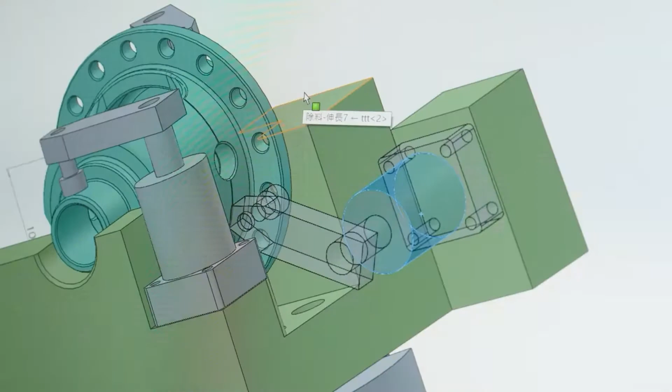Facing the fast-changing era, by refining its strengths in the industry, HOTA is always creating brand new values between tradition and innovation. With great visions and company strategies, HOTA has transformed from traditional manual manufacturing to one of the promoters in the field of intelligent technology in the era of artificial intelligence.

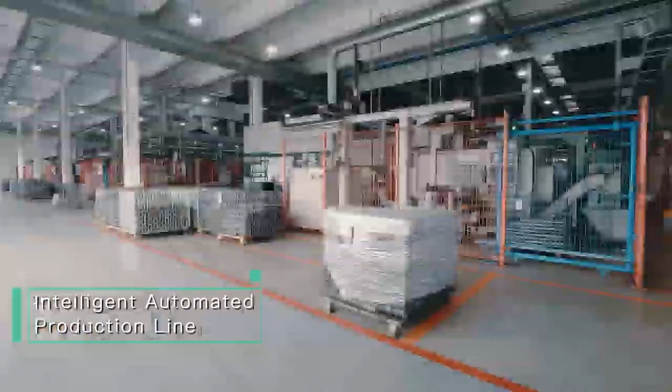HOTA has the finest R&D team. Our customers from all over the globe rely on our engineering capability and co-develop products with HOTA as their trusted partner. From monthly-based to minutes-and-seconds-based production processes, the key element of what we call the magic process is the introduction of one-piece flow automation.

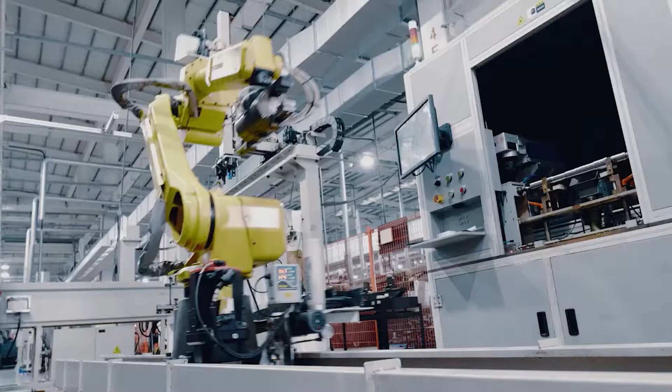At the beginning of the manufacturing process, HOTA introduces the technology of virtual ID and QR codes to establish product traceability and strictly review each process.

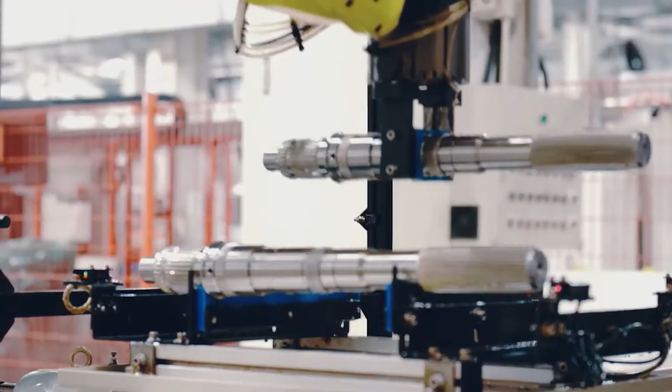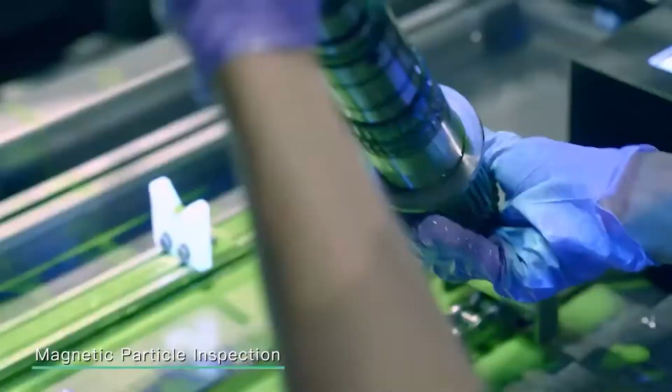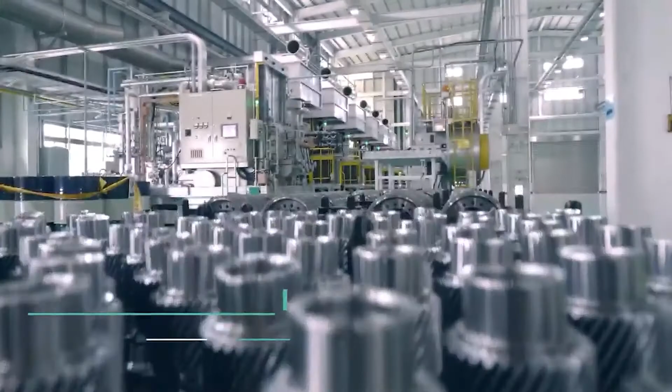We believe that the combination of manpower and machine plays an important part in our quality control. The simultaneous utilization of top-grade equipment increases the strength and wear resistance of our components.

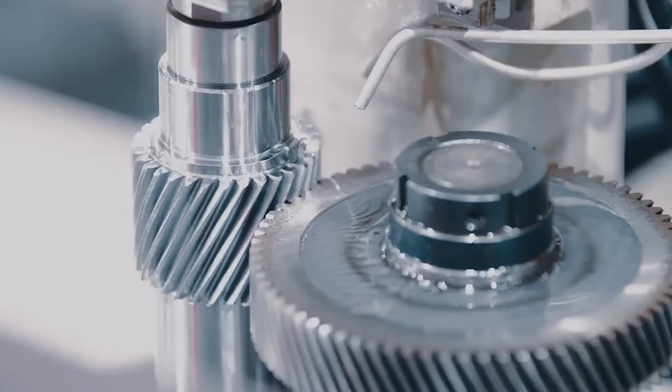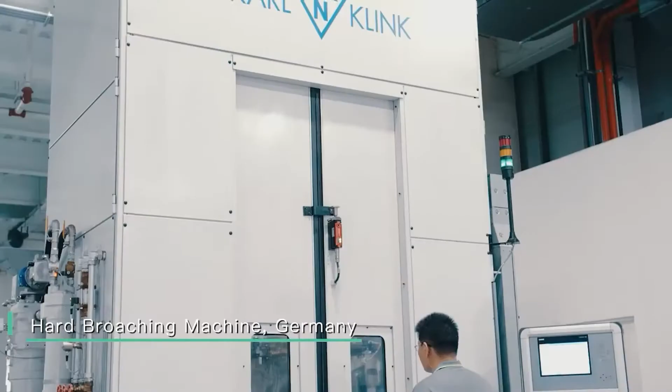HOTA is committed to developing its own gear machines and also investing in world-class advanced gear grinding machines as the highest precision finishing process. HOTA is the first company in Taiwan introducing German hard broaching machines in order to enhance the company's key technology and strengthen core competencies.

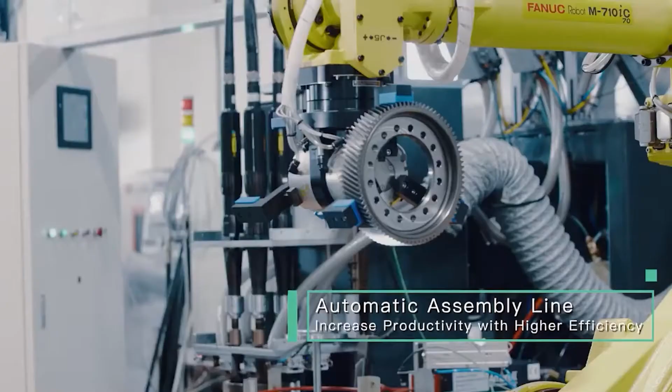Compared to traditional production lines, utilizing automation and intelligent management can save up to 70% of the manpower. Moreover, through AI integration, it helps us analyze and improve production lines more effectively.

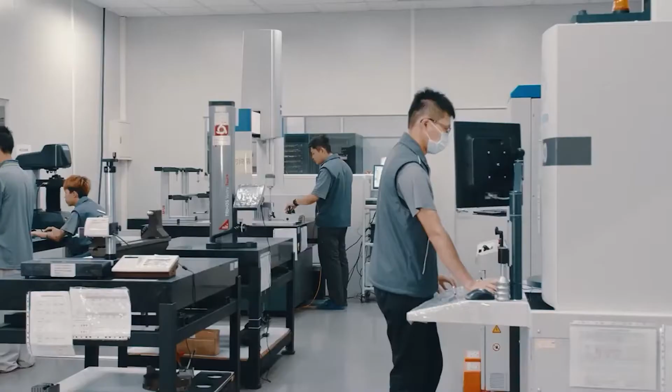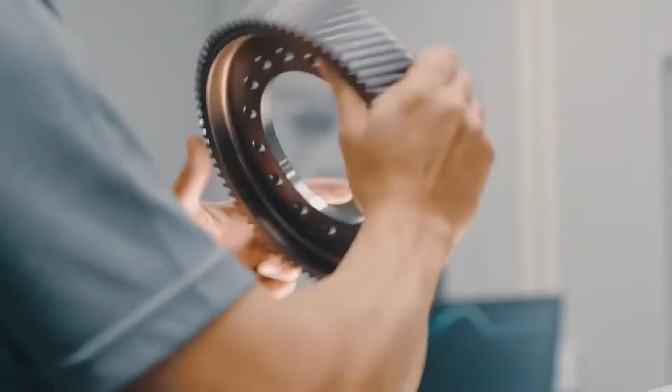In the high-speed production flow, our products pass repeatedly high standard tests and strict in-process inspections. The yield rate reaches as high as 100% for finished products. This result motivates us to engage even more actively in developing and expanding the scale of our automatic production lines.

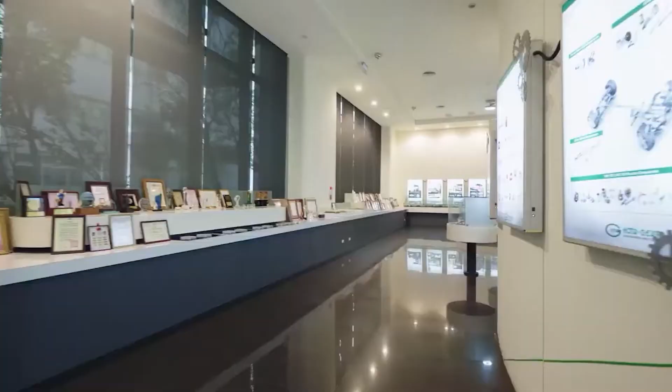Innovation, quality, and efficiency have always been HOTA's core principles. We are proud of awards and certifications from domestic and global customers and professional institutions.

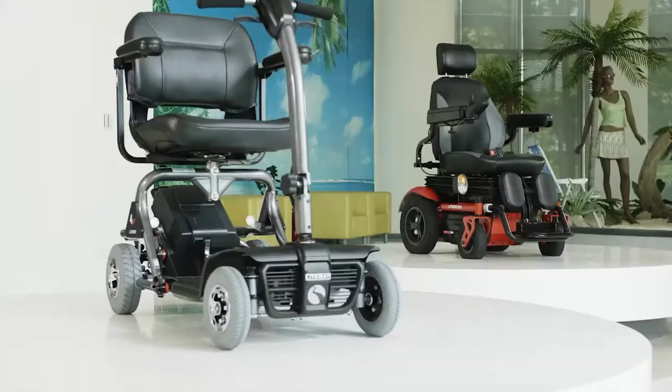Reaching out to our global partners and customers from Taiwan, we are committed to providing our services with no geographical boundaries and time differences. HOTA designs and develops user-friendly products with our own technologies, including gear machines, electric wheelchairs, electric scooters, electric ATVs, powertrain components and assemblies for EVs, ICE cars, motorcycles, trucks, agricultural equipment, and industrial machinery.

With its excellent capabilities, HOTA manages its business across multiple dimensions and industries. In the meanwhile, HOTA has also been actively participating in social welfare as part of our corporate social responsibility. HOTA is committed to promoting the use of renewable energy as a socially responsible corporation. We aim to build a green and intelligent life for a better future.

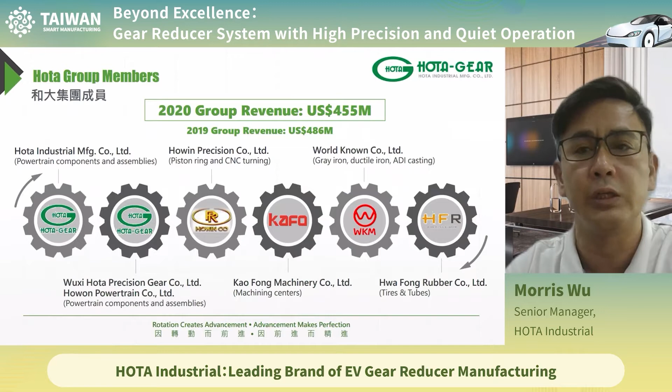As we all know, the pandemic brought economic impact globally last year. HOTA Gear consists of 3 divisions. The transmission division is the biggest scale and is the main source of revenue. The other 2 are the medical equipment division and the machinery division.

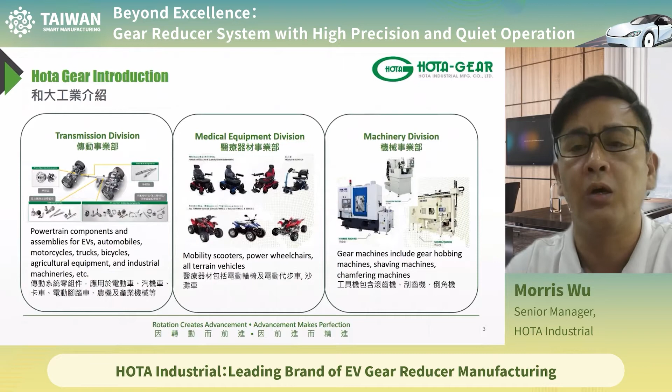Having nearly 60 years of experience in machine, we have developed our own gear machines, including gear hobbing machines, shaving machines, and chamfering machines. The company was founded in 1966 and is now in its 56th year.

We started out as a motorcycle parts manufacturer, and in 1995, we transformed into an automotive manufacturer. It was also in 1995 when we entered the US OEM market. The company went public in 2000, and in 2012 we started to exploit the electric vehicle market in the US. Our entry into the electric vehicle market was several years ahead of other domestic companies in the industry.

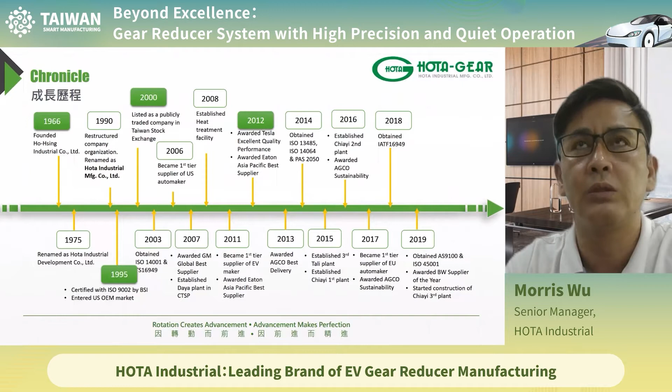HOTA has built a global network worldwide. Our headquarters is in Taiwan. We have sales and logistic offices on the East Coast and West Coast of the US. In China, we have manufacturing plants in Wuxi and Huai'an. And then in Japan, we also have a sales office in Osaka.

What you see are our production bases in Taiwan. The Daya plant on the left is where the company headquarters is located. The Tali plant on the right is where we started the company from scratch. Then we have the rather new established factory in Chiayi, plant 1 and 2. Both plants are mainly responsible for manufacturing components and parts of electric vehicles and hybrids.

Production lines here carry out one-piece flow automated manufacturing and are under intelligent management. At present, because our business in electric vehicles has been growing fast, Chiayi Plant 1 and 2 have already reached full production capacity, which gave rise to the planning of Plant 3. The hardware construction of Plant 3 was completed in May, and we are now in the process of moving in and setting up the production lines.

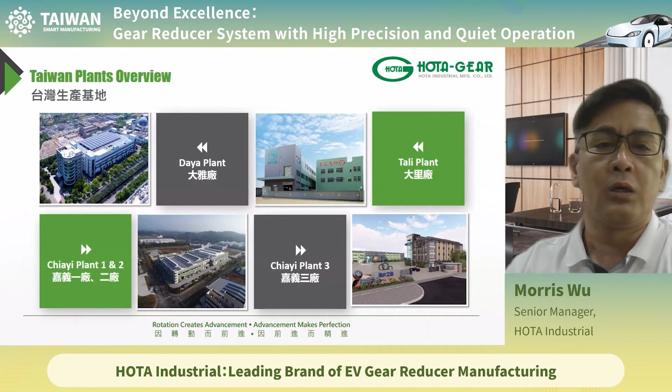Let's take a look at the machine automation in our company. On the left, you can see the automated production line. No manpower is needed from the beginning of the manufacturing process to finished products. We introduced QR code technology to enhance traceability. We can track the status of each machine at a certain minute and second to strictly review each process.

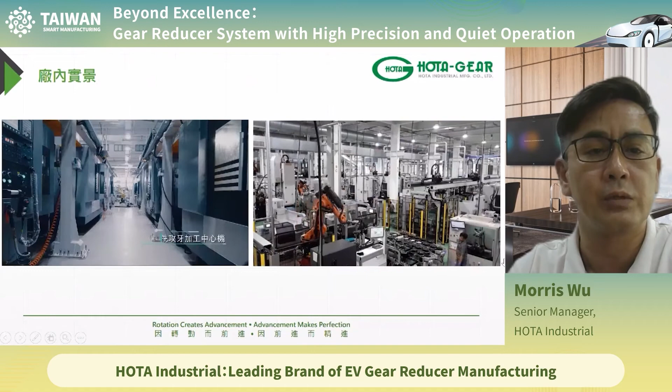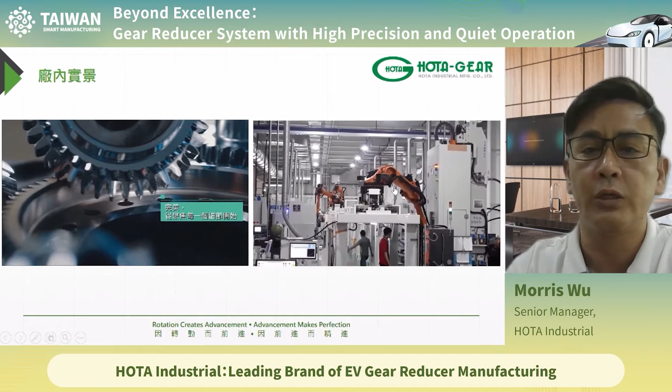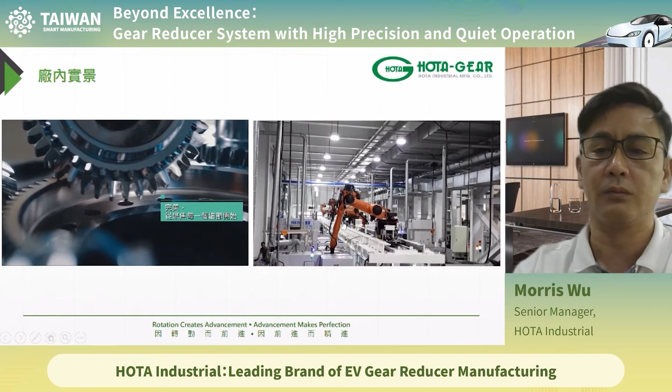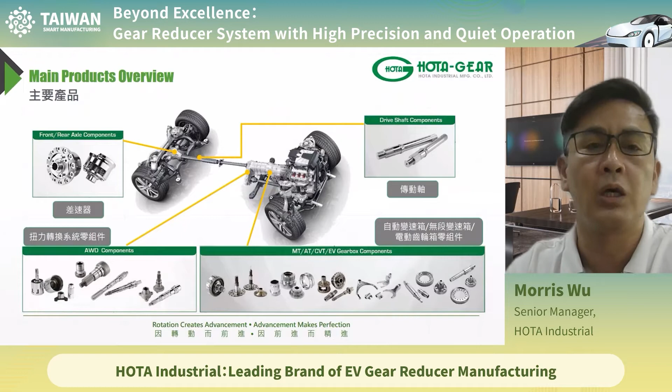Next, I would like to cover more about the transmission division. I did briefly mention our machining products of chassis parts, and now let me break down the main products into more detailed categories. Basically, HOTA manufactures transmission products from engine, transmission, transfer case, transmission shaft, front and rear axle to cantilever. HOTA owns excellent capabilities in machining, including electric vehicle transmission and motor shaft that are now on the rise.

For the time being, North America is our biggest market. Among all our products, about 85% are manufactured for automobiles and trucks. And among those 85%, 40% are for electric vehicles and hybrids.

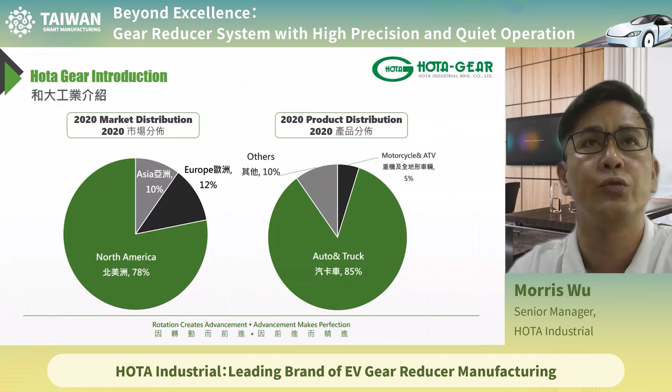Also, there are a few hydraulic and traction transmission manufacturers, but I won't go into too many details here.

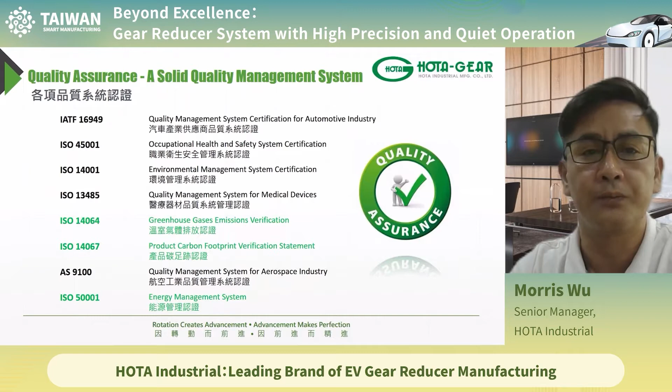HOTA owns outstanding inspection capabilities. We have testers able to carry out a wide range of inspections, including hardness, chemical materials, and microstructure. Our products are more of high precision, so the testers need to cover geometry and different dimensions and size. Besides contact inspection, we are also developing AOI, moving towards optical inspection.

Then it comes to what we do best. Since HOTA is a gear manufacturer, we have all kinds of gear measuring machines, including gear testers and mesh testers by Germany, America, and Japan.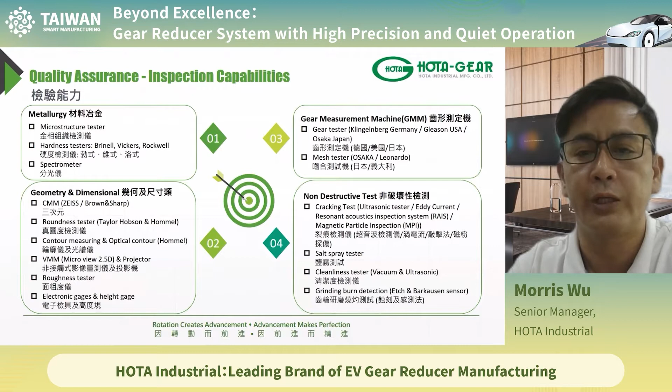We are also capable of conducting non-destructive tests. There are various kinds, all of which have to meet the strict requirements of our customers. One of them is cleanliness, which is especially and strictly required for electric vehicles. HOTA has actually started the introduction and practices of cleanliness testers since 10 years ago.

In terms of our manufacturing capabilities, HOTA can do all kinds of before and after heat treatments. We are equipped with the most comprehensive capabilities in soft machining, from gear hobbing, gear shaping, gear shaving, and broaching, to turning, milling, drilling, gun drilling, and spline rolling.

Then comes to after heat treatments, which is hard finishing and requires higher precision. We are capable of gear grinding, hard broaching, hard hobbing, gear honing, OD and ID surface grinding, and we can also conduct shot peening and straightening.

The requirements for electric vehicles are becoming more and more strict in recent years. In terms of gear grinding, our company started the research and development more than 20 years ago, and the technologies have already been very mature, which is why our global customers put their trust in us.

One of our clients is a world-leading American automaker. They came to us and we helped them achieve quality noise reduction.

We keep focusing on enhancing our capabilities, including developing vertical integrated forging plants and heat treatment plants for laser welding, electron beam welding, and so on. We continue to update and refine our manufacturing capabilities and introduce more advanced technologies so that we can maintain our competitiveness in the increasingly challenging electric vehicle market, as well as provide the best solutions to our customers.

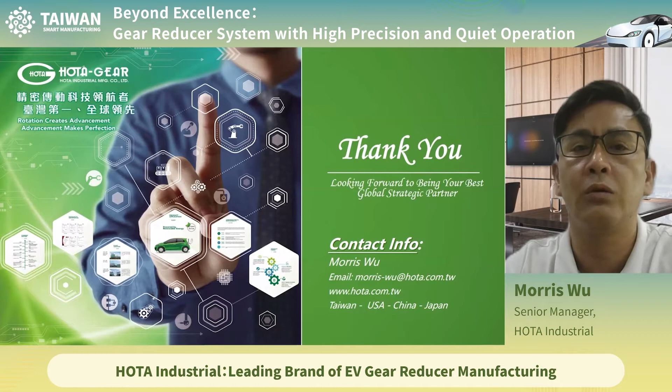Machine tools is a crucial processing equipment for automobiles and motorcycles. Today, we are pleased to have Jason Yu, the Assistant Vice President of KAFO, to share with us their high-performance machining centers that support the key components of electric vehicles. Let's welcome Jason Yu.

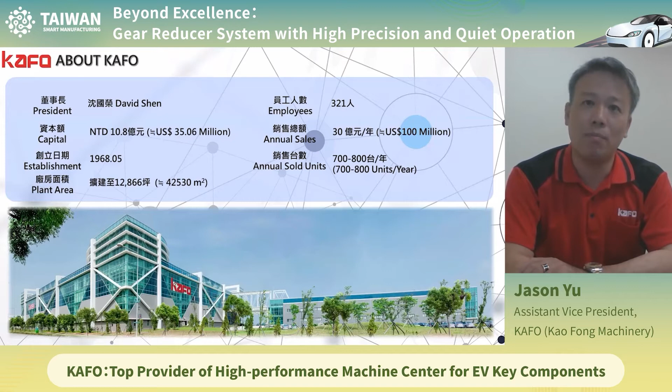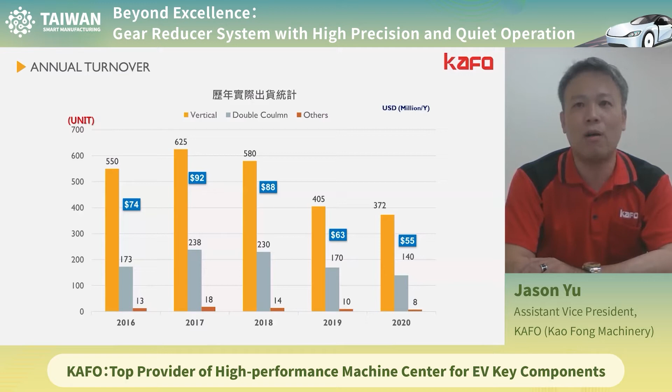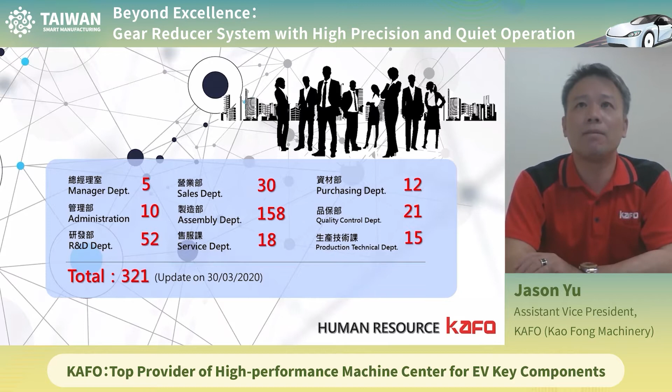But then we met Mr. Shen. He believes that machine tools are one of the most important production tools, and they are closely related to the manufacturing of his company's products. Moreover, there are a wide range of applications to the downstream sectors, such as traditional machinery, automobile, power equipment, railroads, ships, aerospace, national defense, petroleum, chemical engineering, machinery, and medical industry, all of which require machining tools to complete the manufacturing process. After Mr. Shen joined KAFO's big family, he gave the company a very clear orientation, which is quality first, service first, innovation, and R&D, so that everyone has a goal of moving forward to learn and progress. Because of this, KAFO was able to slowly turn the corner.

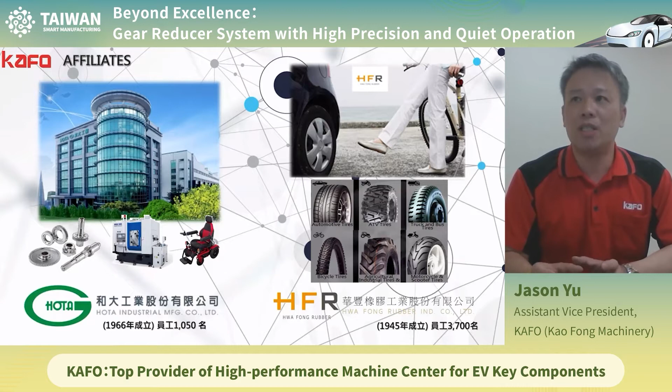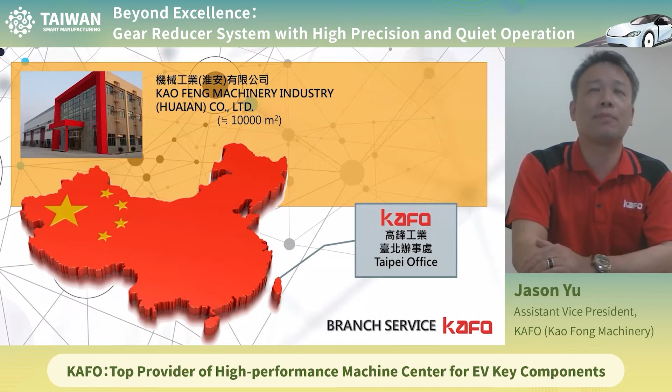As mentioned, KAFO's marketing distribution used to be limited, but after the efforts we put into our business in the past 10 years, we have made our way to the global market. Our customers are now mainly in Asia, which accounts for 60%, including Japan, Korea, China, Singapore, Malaysia, Indonesia, and India. 10% are in the Middle East, mainly in Turkey. We have clients in both Eastern and Western Europe. Almost all European countries use KAFO's equipment. Our Americas market is mainly located in the US and Canada. Only 1% is in Africa, which is the market KAFO needs to work hard to expand.

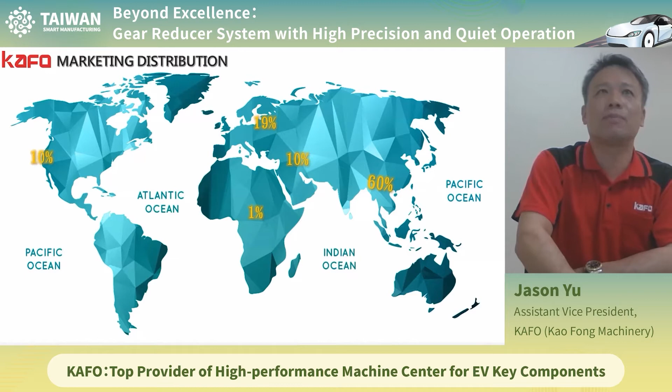In terms of certificates, we have ISO 9001 and ISO 14001. These are the certificates KAFO received from the Taiwan Excellence Award in recent years.

Our products consist of 5 categories: vertical machining centers, double column machining centers, horizontal machining centers, 5-axis machining centers, and gantry-type machining centers. For vertical machining centers, there are 3 sub-series: the 3-axis linear guideway design, the 3-axis hard rail design, and the design of XY-axis linear guideway with Z-axis hard track.

Most of our EV customers choose the 3-axis linear guideway series because their products are of smaller size and require high precision. Some customers require high precision but also need heavy cutting. Then they will choose the series of XY-axis linear guideway with Z-axis hard track.

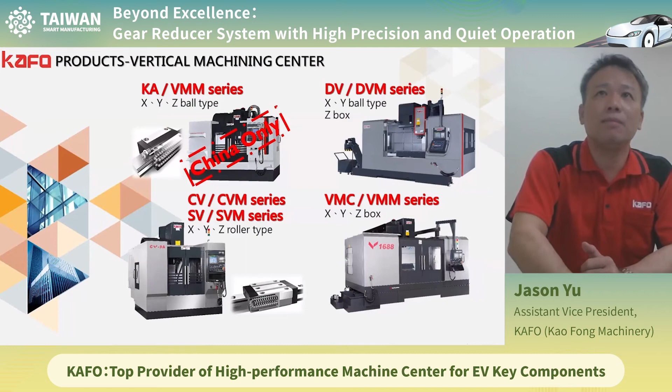For double column machining centers, there are mainly 3 series: the standard double column machining centers, the gantry type 5-axis machining centers that go with automatic additional head, and moving cross rail 5-axis machining centers.

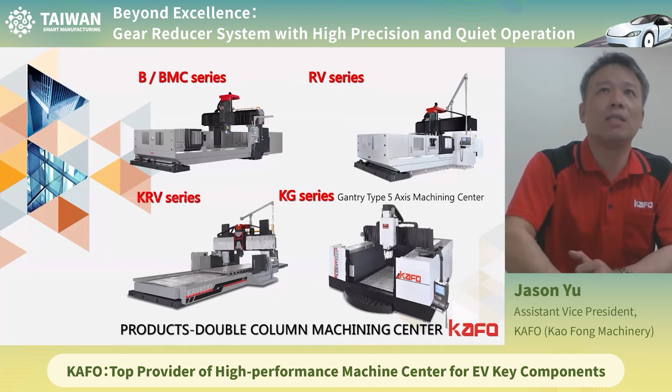For horizontal machining centers, different series are named based on their size. KAFO currently has 4 types of horizontal machining centers: the 500, the 630, the 800, and the 1 meter.

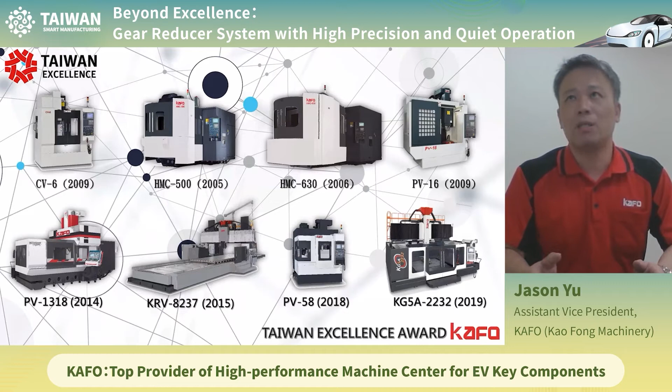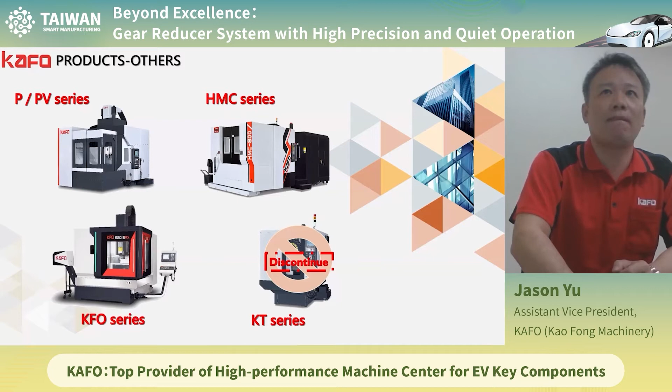For the 5-axis machining centers, KAFO currently has turntable diameters of 400 and 600. For the gantry type 5-axis machining centers, the range can vary from 2 to even 10 meters or longer. There is no standard or unified size regulation. Products and machines of different industries can be large or small. Therefore, KAFO provides customers with customization service according to different needs.

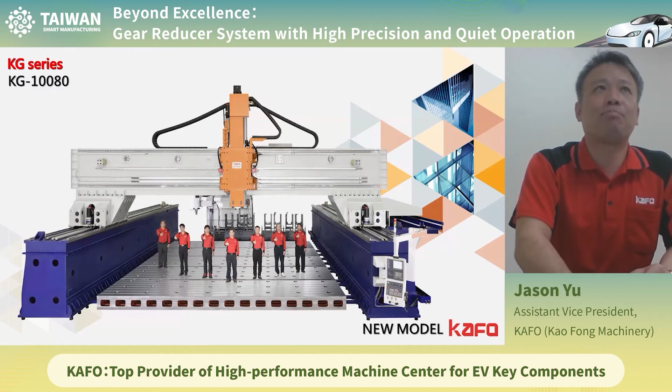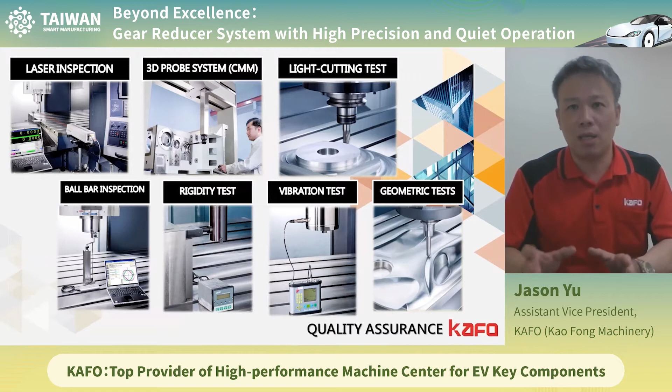KAFO has put significant investment in inspection equipment. Currently, we are able to carry out 3D probing, ball bar inspection, vibration test, and geometric test, all of which are to ensure the parts we buy and the finished machines we make are of optimal quality.

In the machine, the most important precision unit, if the controller is not counted, is the spindle. KAFO has started R&D of spindles since early days, and we can now produce our own. Only 10% of Taiwan's machinery manufacturers have such capabilities; the other 90% mostly buy spindles from others.

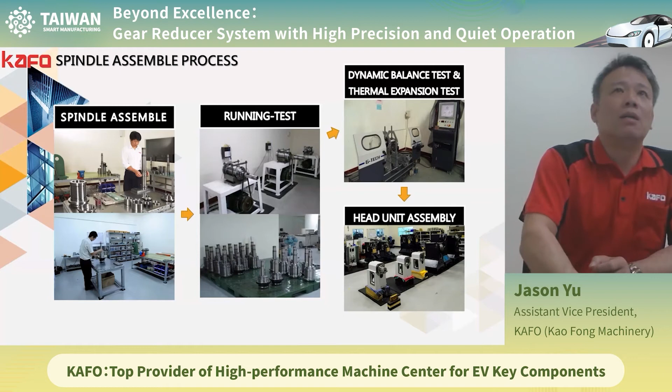In terms of machining centers, not only does KAFO have its own machining centers, but to meet product requirements, we have also imported devices from Japan. KAFO develops our own technologies. We can cooperate with other manufacturers for external processing, while keeping the core technology in-house.

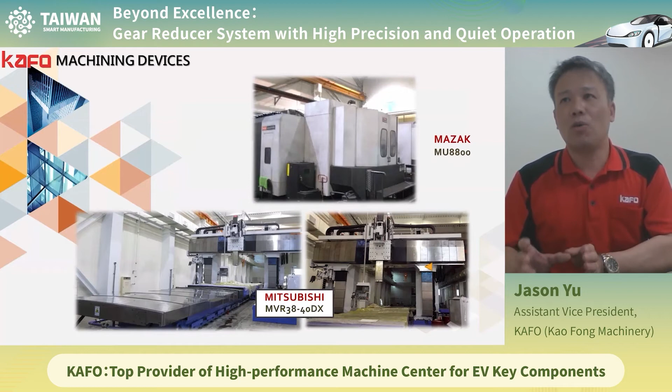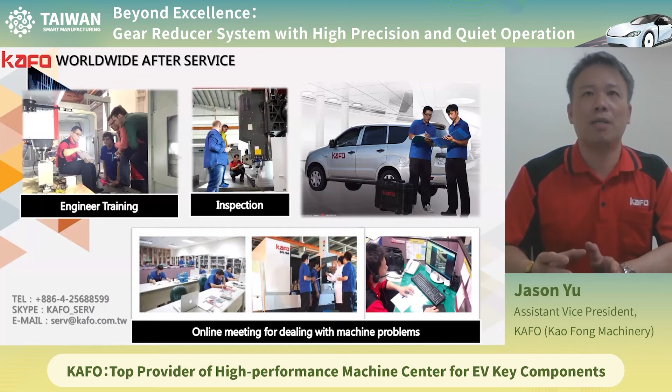As mentioned earlier, service first is one of the 3 core principles of our company. We hope to keep our service available to customers all over the world 24 hours a day without waiting or stopping. We aim to provide in-time service and reply to any questions anytime.

That concludes my presentation today. Thank you for your time.